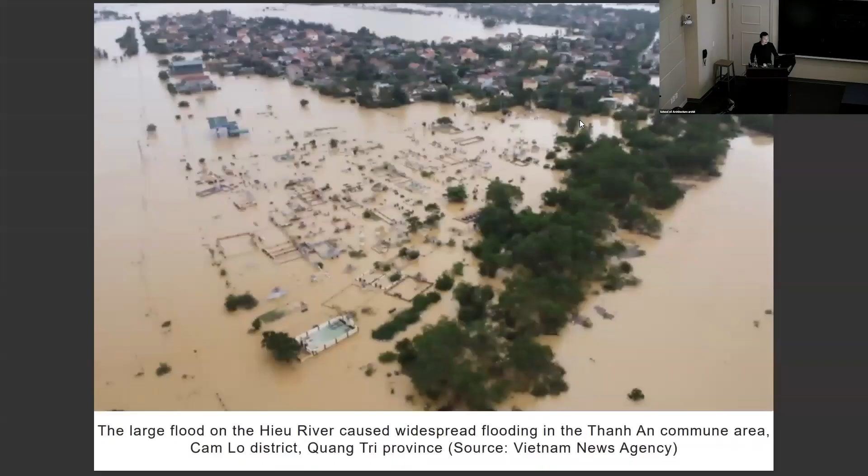First of all, we are dealing with climate change right now, with the flood, flood again, and the flood in Vietnam a few years ago, and the wildfire, and this in the US in 2023. Let me explain the air quality in Vietnam and in the USA. The East Coast is almost green, but there the color is about red, or even worse than red.

And then here is Ho Chi Minh and Hanoi.

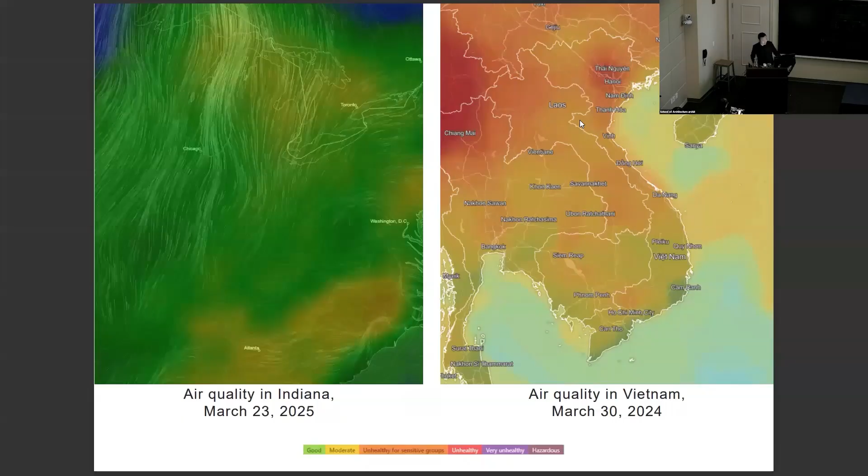In March 30, 2024, it became a very unhealthy situation in Hanoi, and one of the reasons is the lack of greenery. In Ho Chi Minh City, it's only 0.7 square meters per person, and in Hanoi only 2 square meters per person. In East Asia, the average is about 6.2 square meters per person.

Because of that situation, here is the real picture of Ho Chi Minh City with extreme lack of greenery, causing many problems like pollution, traffic jam, and climate change, especially in Vietnam. So what we would like to do is change this current situation to be more green for the city.

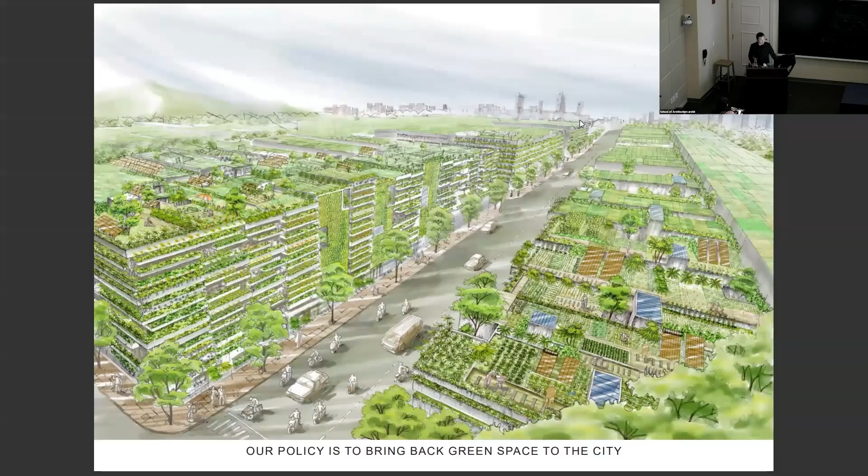For the new master plan, since Vietnam has a lot of rain and sunlight, we propose agriculture on the rooftop and facade to increase the green area for the city. We can also store water on the rooftop, otherwise if everything is concrete, it's easy to get flooded.

Let me explain one by one. For example, here is a really typical type of house in a dense city like Ho Chi Minh City, which is just 4 meters wide and about 20 meters deep.

The environmental strategy is we cover the house all around with greenery, which can stop very strong sunlight and a little bit of polluted air, while sunlight can still go through the house.

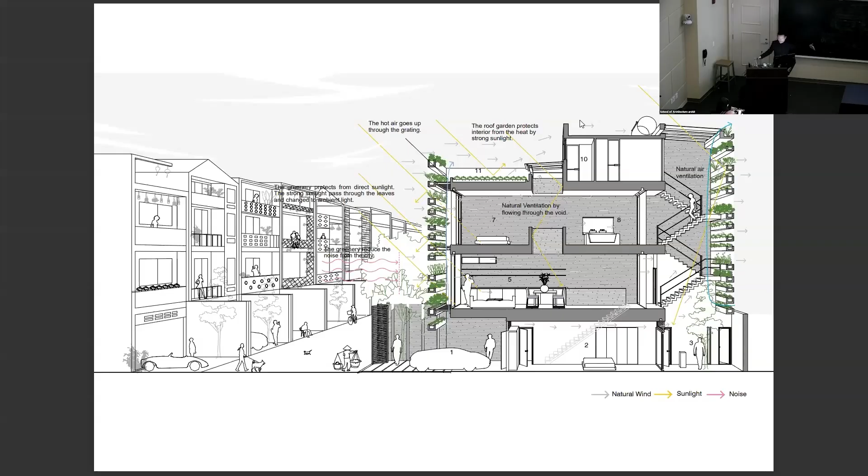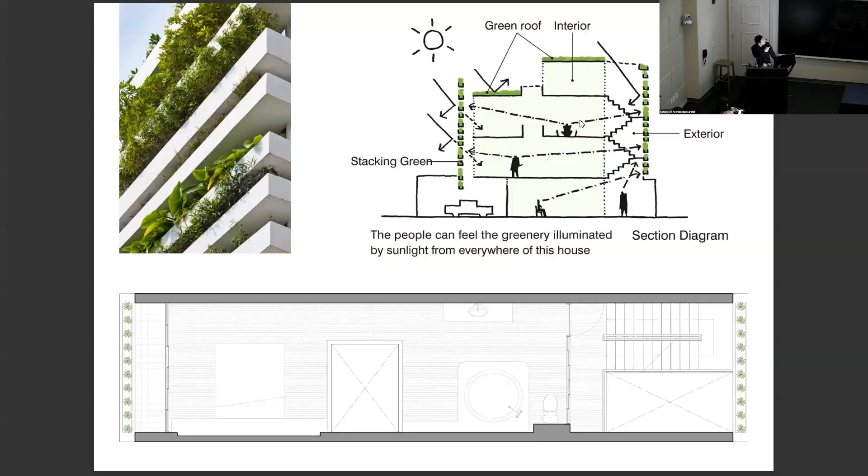This is really small, only 4 meters wide and 20 meters deep. The staircase also functions like a small garden in the backyard, and we still have ventilation with vertical air flow going up. In the plan, you can see the bed is almost as big as this already, showing the scale of the building.

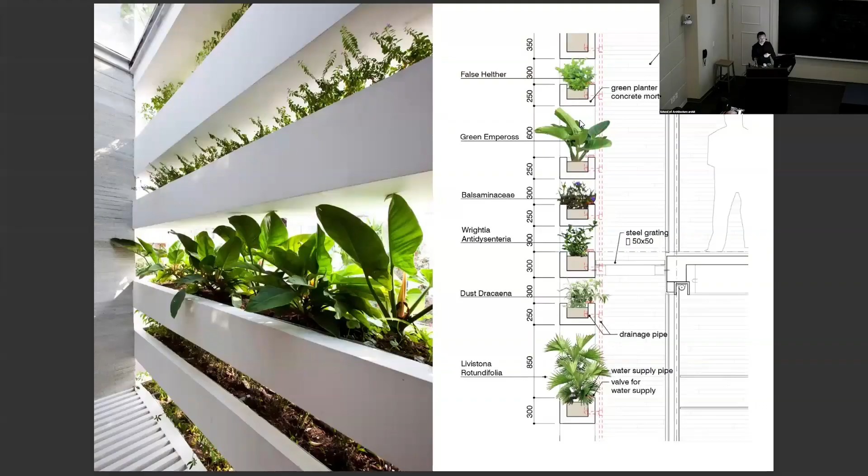For tropical climates, here is the whole weather consideration - instead of regular glass, it should be green and glass. It's better for ventilation and also for the really super hot summer.

You can see the plan here. It's quite small for the house, but it has one bedroom, garage, living, dining, and one more bedroom plus another bedroom on the rooftop. So three bedrooms within a really small house - this is a really typical house in Vietnam.

Here is the living room, dining room, and bedroom. It looks big, but in fact there's just 1.4 meters left from here, and the bed is like this. And the bathroom.

For another project, we are trying to make each project become like a small park for the city. Here is the kindergarten for the Taiwanese shoe factory, where about 23,000 workers work, and their children go to study here.

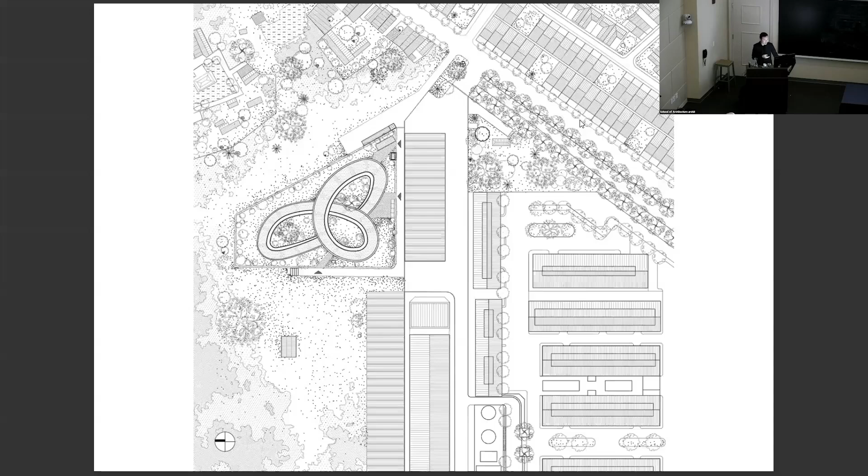We proposed this with 3 courtyards, and the courtyards continue up to the rooftop almost unlimited, extending the garden as playground space for the children. The factory is here, and with the 3 courtyards connecting together, we maximize the playground for children from the ground to the rooftop and back again.

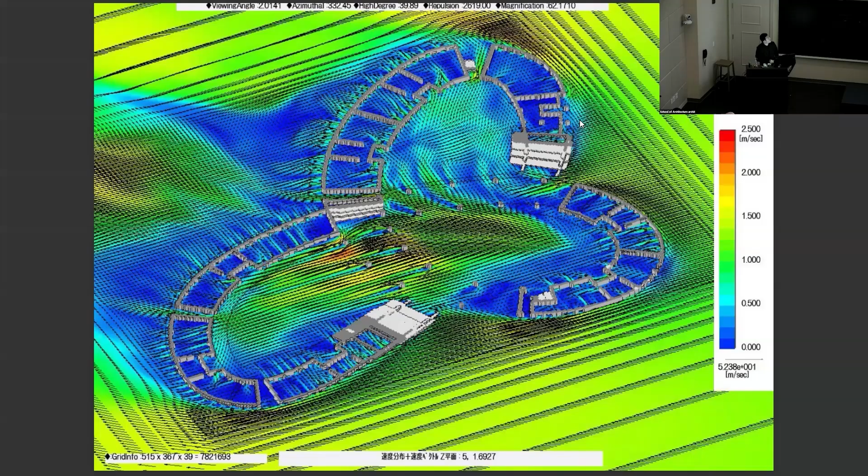Because we don't have budget for air conditioning, we need to calculate the wind carefully to make sure that everywhere within the building, in every classroom, we have wind passing through, with a green rooftop farm on top.

For the school, the children can enjoy growing vegetables, and we chose a type of vegetable for them to have a little bit of an interesting landscape.

Because their parents are farmers, they know how to grow the vegetables very well, and the children can enjoy that process together.

You can see here the courtyards connecting together, and it grows up to the roof.

Another building here is the House for Trees. I designed it for a depressed client - he was my friend, and he had a problem with mental health. So we designed the house.

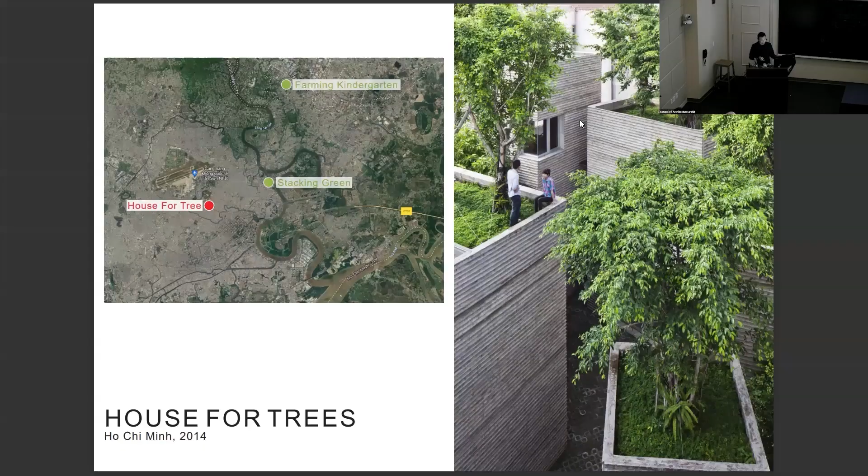It looked like a park because it's in the middle of a concrete jungle with steel roofs, so we thought we should add a lot of greenery to the building itself, because he tends to stay in his room rather than going out. This house is really difficult to stay in because even if he wants to go to the toilet, he needs to go out of his room.

The building makes him go out, even when he goes to the dining room for lunch or breakfast he needs to leave his room. So it makes him go out many times for the restroom, for a shower, for food. Gradually his symptoms became okay, and then he started to complain, 'Hey, there are too many birds coming to my home to sing every day, because the surrounding area doesn't have many trees, so they come here to play with him.'

The concept is really simple. It's just three pots, three boxes with concrete formwork, bamboo formwork concrete. It looks like a solid box from outside, but in reality it's open to the courtyards inside, very open. Intentionally from outside it looks like a closed tree box, but it opens very well to the courtyards.

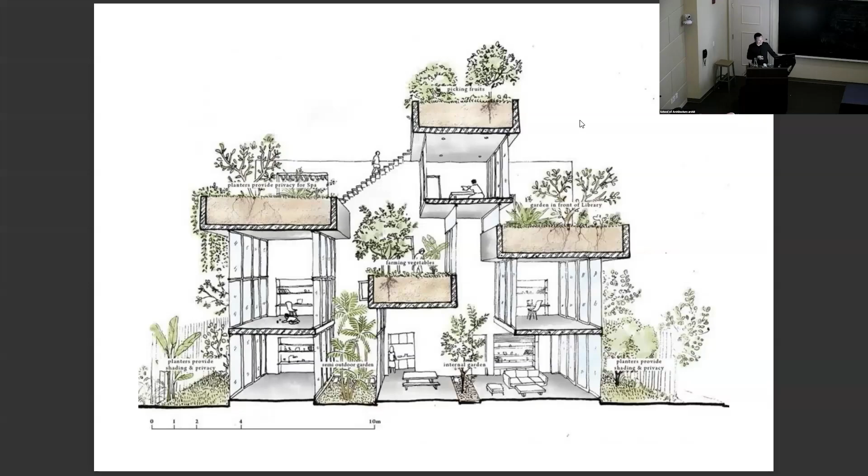Of course it's easier to live in than the previous house. You can see here, from this point you can see many levels of the house and see through the space.

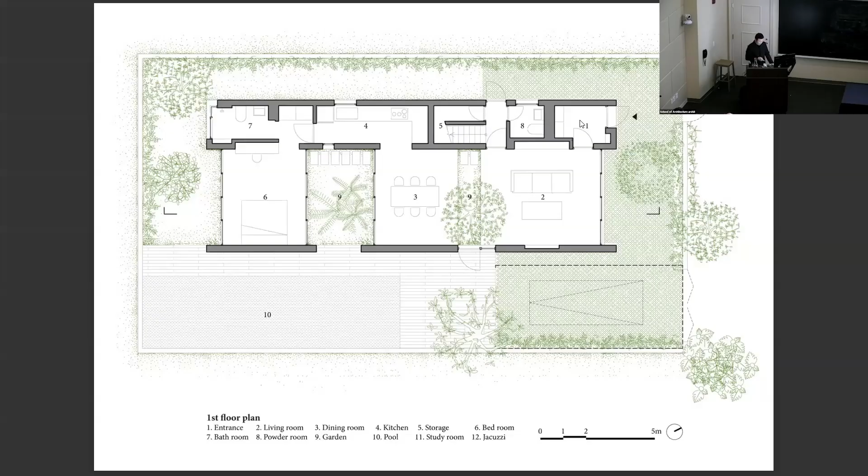That's why the son was able to quit gaming, started to learn well, and finally entered Sydney University for computer science. Somehow architecture can change the lifestyle of the client very well. You can see here many layouts, many steps of the garden.

Another example is in the middle of the concrete jungle of Da Nang, because of the development you can see the concrete all around. We thought we'd make a little bit of a difference by keeping it really simple, but on a very small site, about 7,000 square feet of land, we built 153 hotel rooms. So it's quite a lot.

For the facade and the entrance, we still combined the concrete, bamboo concrete formwork, and timber and bamboo for the interior space. It still feels local, but in reality it's a really big building with a lot of area inside. It's a bit of a pity that we don't have space for a void for the check-in area or restaurant, but you can see between the concrete hues it appears really nice.

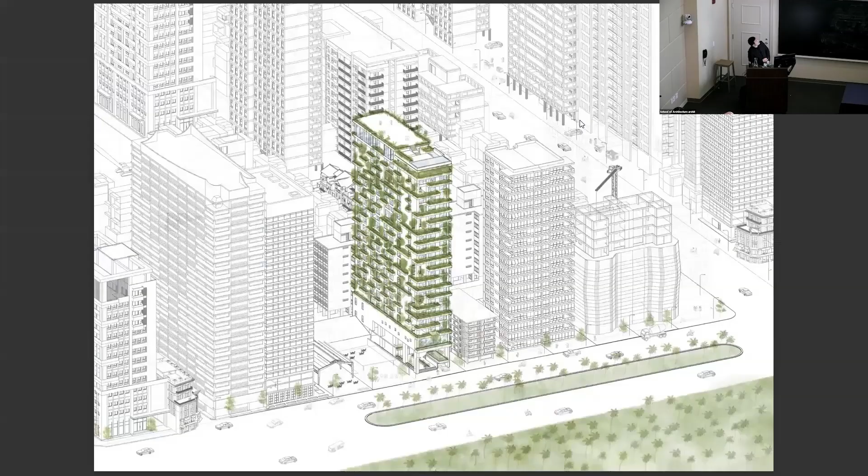Another house is easier to explain. It connects to the park here, so we wanted to introduce the park going through the house this way, and we have a huge void in the middle where you can see the park go through the house. From here you can imagine the weather in Vietnam, which has a lot of rain and sunlight for free.

There's a rooftop garden connecting to the park. You go in, go up, and you're living in the park. As I've mentioned and will say again, each of our projects is like a small pocket park for the city, so as we add more and more projects, the city gradually changes.

Luckily, a lot of Vietnamese architects also like this way of integrating greenery into buildings, and together we are changing the city. We don't have space to plant trees outside, but we use our buildings as devices to change the city landscape. This next house is even narrower, less than 4 meters wide, from here to there.

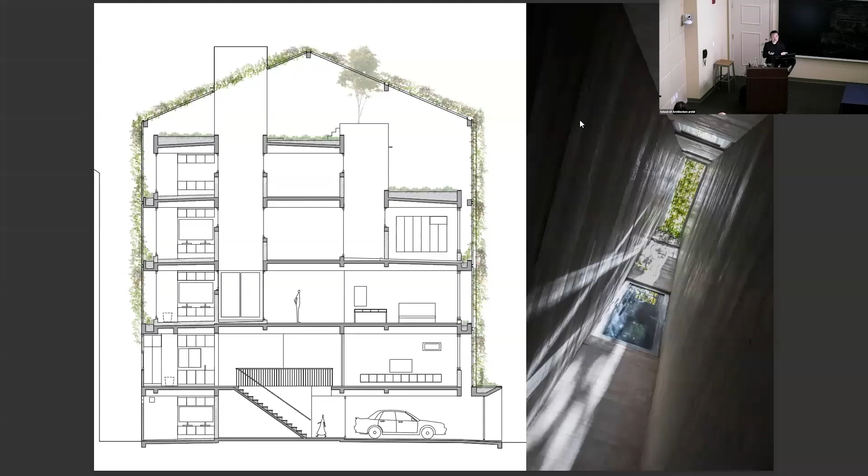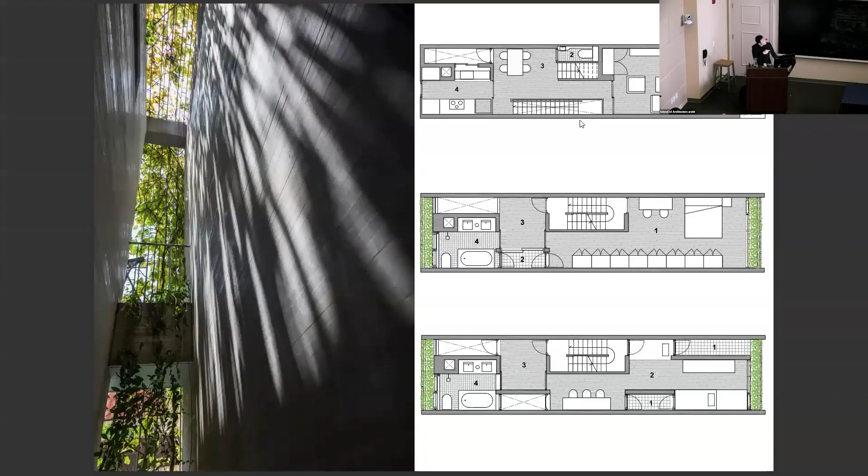Between those courtyards within a really tiny, very small house, we cover it with greenery like this. The courtyards in the middle are here, and this is the facade for the house. You see the scale of the staircase here, almost more than half of the house, which shows you how narrow it is. But we still have a good, five-star standard bathroom.

One floor connects together, with greenery covering around, and small courtyards for the air to move around the house. There's the bathroom, the bedroom, the courtyards, and the rooftop.

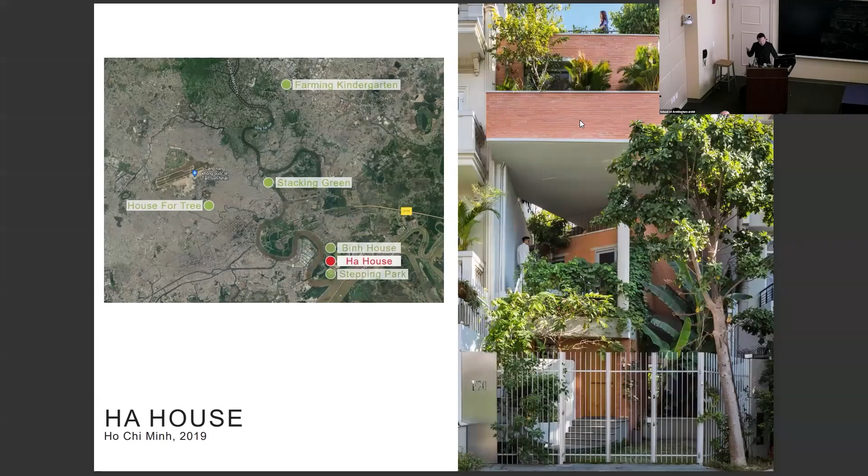And we did that, and during COVID, people in Vietnam, same as China, were locked in their homes. You couldn't go out for any reason for a long time. Then people started to appreciate the space, the garden, much more. After COVID, and during COVID, suddenly the work in my company grew a lot because they felt, oh, it's nice to have that.

This client's is the first house, the narrow house, from when I came back from Japan. I started with my own projects. I didn't have work, so I started by buying 7,000 pieces of bamboo for 7,000 US dollars to build the wind and water cafe. It became well known, but people still kept saying Nghia can only do bamboo, so I started doing the first house for free for my friend.

Now she keeps asking me to do many houses for her—this is the second one, and now we're doing the third, even a fourth, because she said, I like your design very much, you changed my life through architecture. So she enjoys buying the land and asking me to build the house, then she sells it or keeps it, and asks me to do the next one.

This one is the second house. He has a boy, and it's really narrow too—only 7 meters by 20 meters, about 140 square meters, or 1,400 square feet of land. But we still created a stepping garden moving around the house, with the box itself moving and turning.

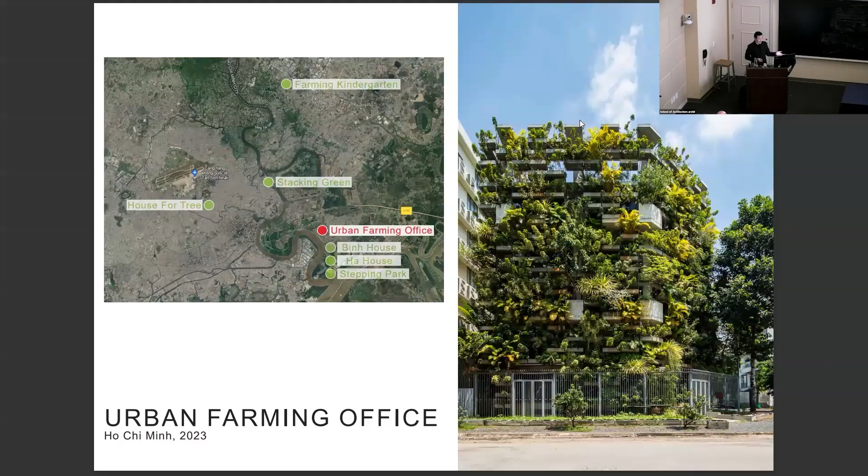That's why it turns, and we still have a swimming pool on the ground floor, with the garden wrapping around. The space inside introduces sunlight and views to the garden—from the master bedroom you can see the garden over there, and the study space. This is my own office in Ho Chi Minh City.

As I mentioned, during COVID people appreciated our architecture more, and we did a lot of work during that period. This building is a very low-cost one, because as an architect we do very simple things for ourselves, but the space—

Here it worked quite well during COVID because we just open the window, don't even use the air conditioner—the ventilation, air goes in, air goes up, and we can stay here and plant vegetables around. We enjoyed the COVID period inside this building because, as I mentioned, we had strict quarantine in Vietnam—you couldn't go out of your building.

The system is quite simple—it's a concrete slab, and we hang the whole tree system outside. This guy becomes the hanging pot holder, but it has a super big beam, and we hang all that stuff to it, and in the same way we hang the pots up top. I think I should go back outside so you can see it clearly.

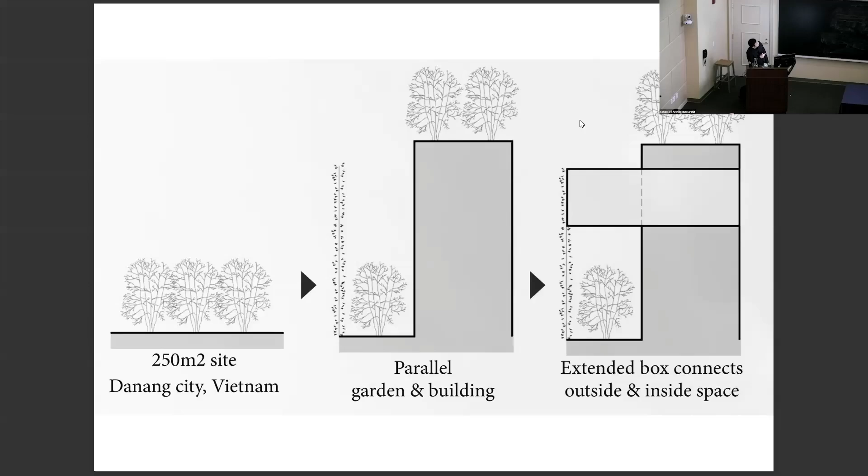So another project, we also think about the building. The house is separated and we make a green facade, and we build a really big pot on top to plant a tree on top.

So the section is like this and it connects together vertically and outside, and the living room can connect, and we still can put the pond and the fish pond here, and we pump up water to the rooftop, and we collect the water from there for the fish — it's kind of an ecological system.

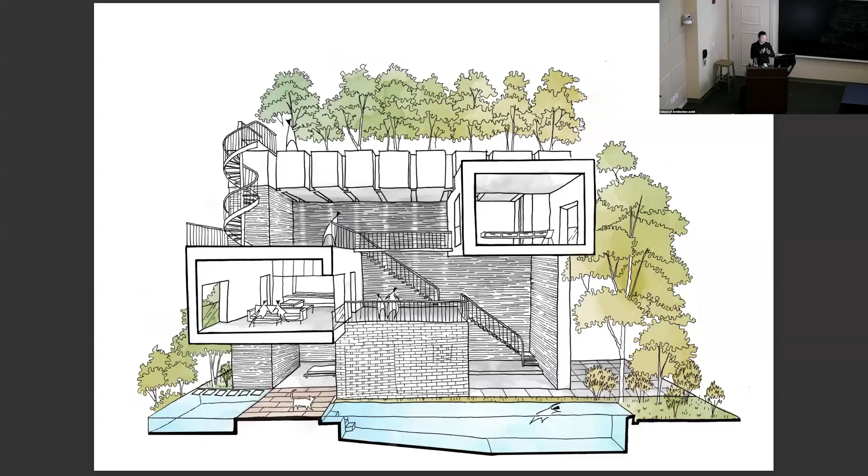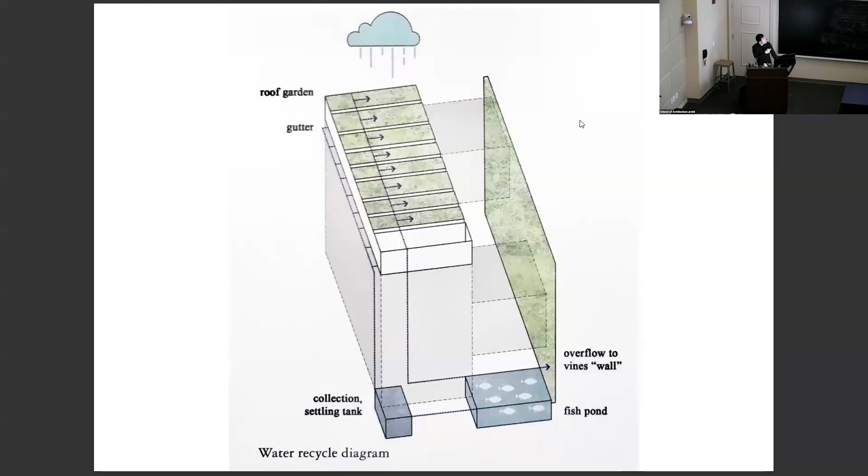And here you can see the way we do it is the green facade, the green rooftop, like this. And we still can have the pool here on the ground floor.

And the connection between the ground floor, first floor, second floor, and from inside to outside. So it works quite well with the weather in central Vietnam and the sunlight.

Of course, not every time in the day — it's just a very short time at noon when the light can go through, and at other moments the light is really soft because of the leaf and the deep pot like this, and the master bedroom.

And gradually we change every project to become a green space for the city. This is outside Hanoi, so we still have some green space around, but we plan the whole thing with really dense greenery.

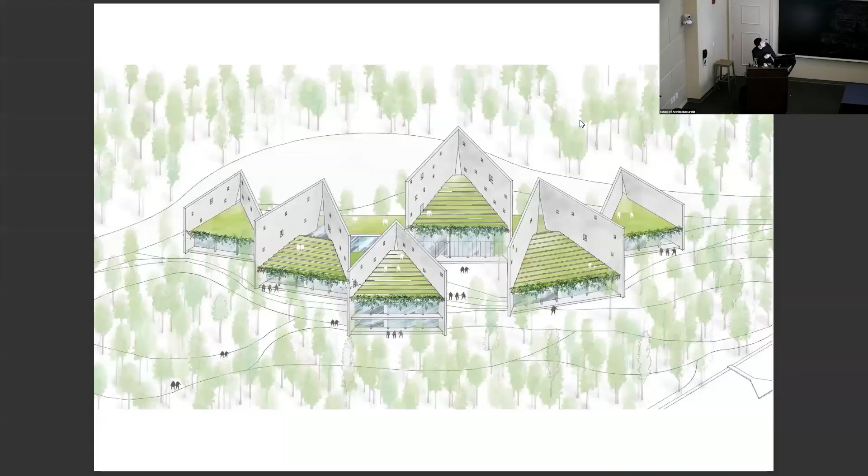For this one is office. Then they can enjoy the courtyards at the ground floor and at the rooftop, and the space inside with the courtyards around.

And this is the Academy Center. The concept is we put the boxes in the middle of the greenery, and we connect them together by a concrete slab. And we build a pond in the middle of the space to make the climate there for the heat.

In Vietnam, in the summer, it goes over 100 Fahrenheit, right? It's about, yeah, sometimes it's 110, and it stays that way for many months. So that's why we designed this to reduce the energy consumption for air conditioning.

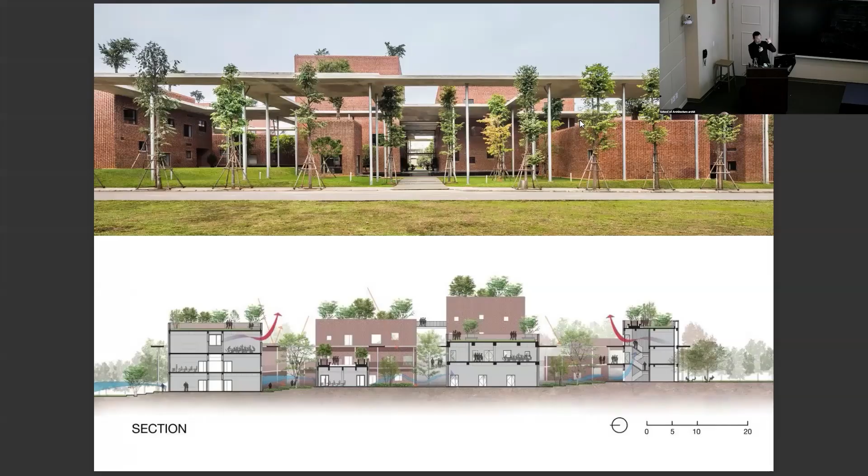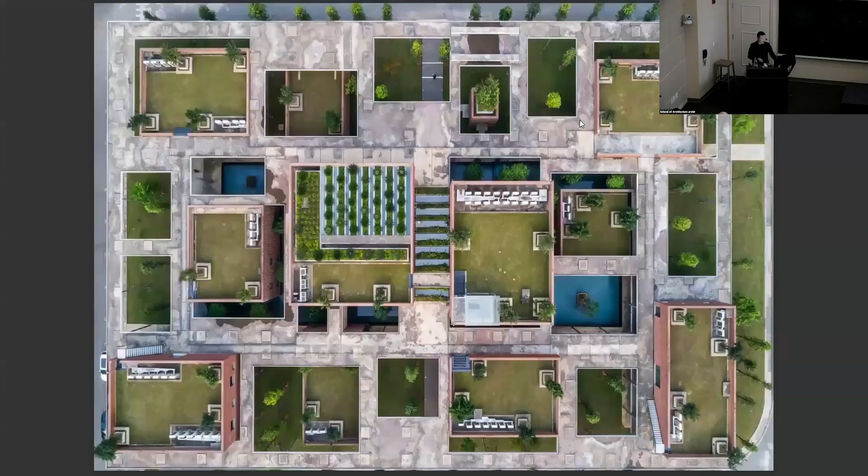And we also make the wall itself have its own shadow from the brick. You see here, they have their own shadow, and the pond in the middle and the tree make shadow too. That's why we can save a lot of energy for the air conditioner.

And manpower in Vietnam is still reasonable cost, so that's why they can realize a really difficult brick construction.

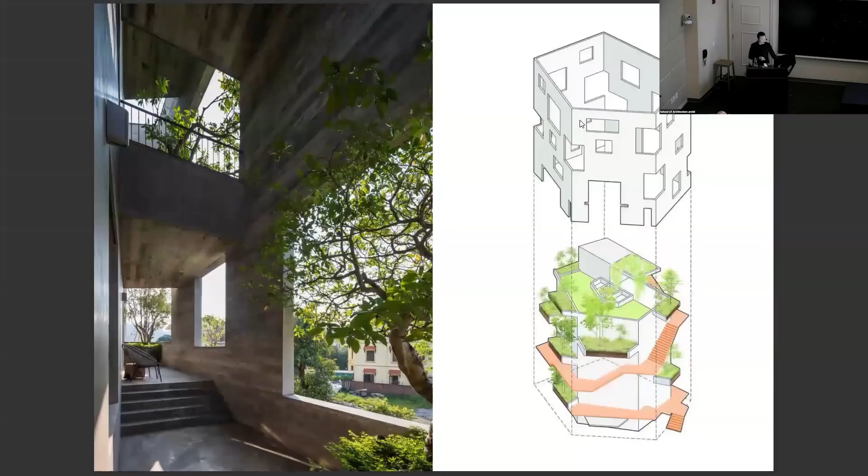And another house — again, I repeat, each house is like a small green space for the city. If we add more like that, gradually it changes. And the system here is the green space going around, with the concrete facade around, and the tree in the middle, and the space inside works quite well during the summer too.

You can see it from outside — we can see a lot of big trees through the window. And the inside space still sometimes has enough sunlight, but it's still soft enough to enjoy.

And the bedroom, with the space in between inside and outside.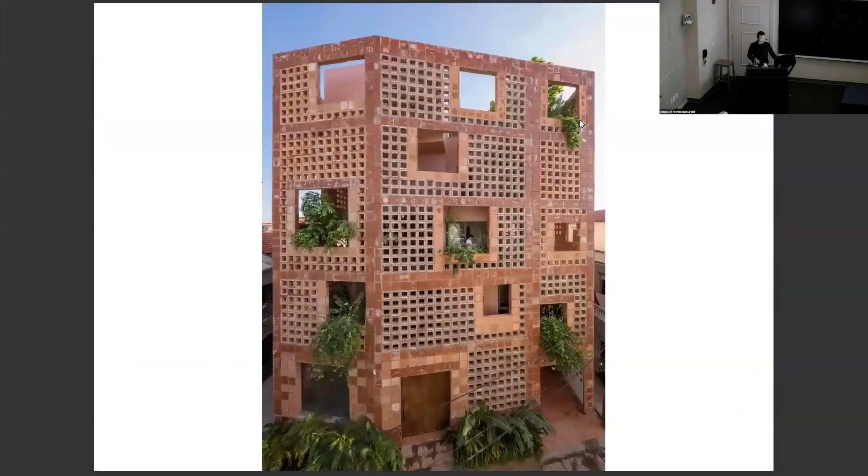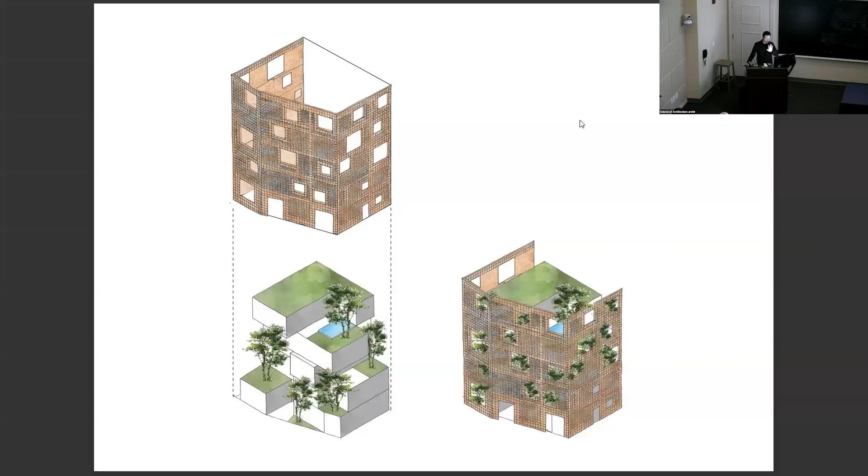And another house in northern Vietnam, Hanoi, is the pottery village, so it's really polluted air around. And then we do the same, and we cover it, since the landscape around is not really nice. So that's why I cover it all by this and filter the view from inside, with the tree in the middle.

And from inside, we can't see the ugly surroundings clearly, just see the space in the middle of inside and outside, like this way.

And another one is in Myanmar. This is a meditation hall, and this work is based on donation. There is a steel factory that donates the steel, so we offer our design for free and construction management for free.

Because the situation in Myanmar right now is that electricity sometimes stops, we design a building like big trees with a big roof going off, and we put it there.

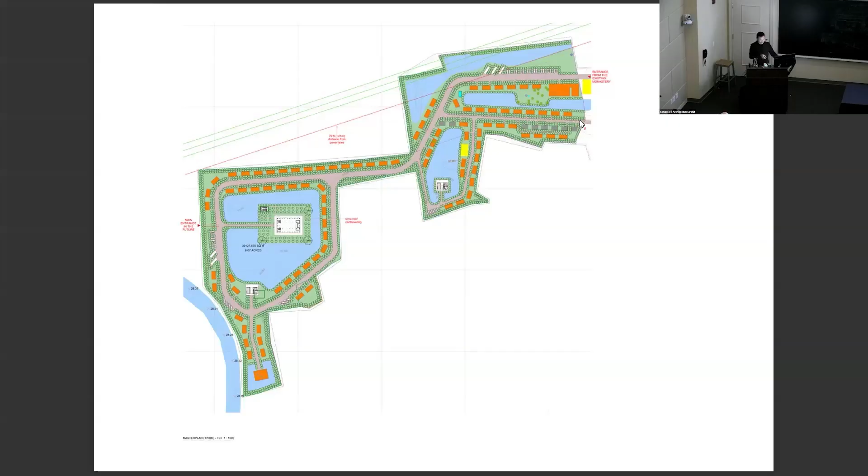So I use the soil around to make the lake and put it for the building. We plant the trees surrounding the meditation hall, and we put it here, tree and water, and the building itself looks like a tree shape.

We have two layers of the roof here, so the hot air goes up, and one more layer for the bamboo roof is here. Of course here is freely open space to the outside, and water goes beyond the tree, the water space. That's why they can still use it during the hot summer, and yangon they don't have winter. The rain there is really big and a lot, so we make a big eave for the roof.

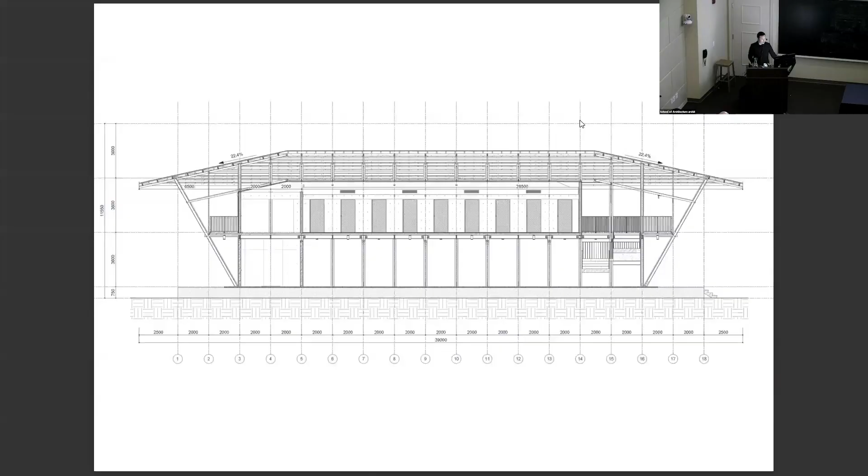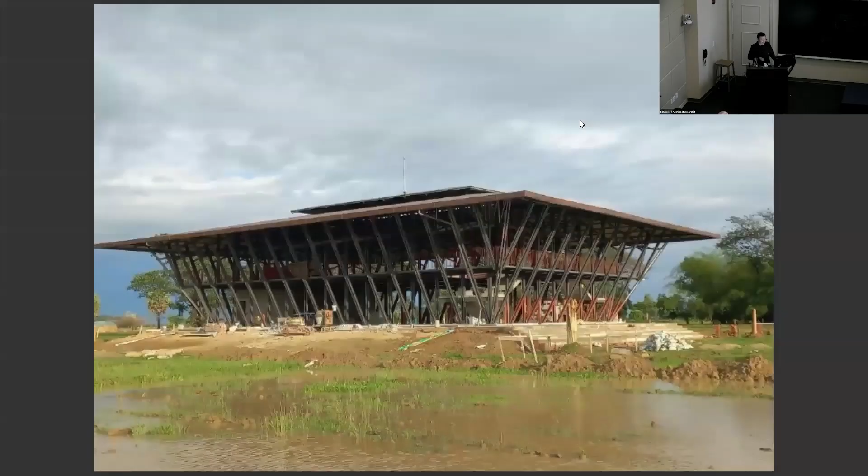They offer the steel. It's really simple structure, but I think it will work very well with the weather there. Gradually, we have 2 layers of the roof, the hot air goes out, and one more layer for the bamboo roof under that.

When we design it, we prepare the system for the steel structure for the solar panel on the rooftop, so later on, if they offer little by little, we can add it. This is not finished yet, the second roof which is the bamboo roof, not finished yet. If it's finished, it looks like this.

And why the view here? Because during meditation, we tend to close our eyes, so the window is really low, for ventilation, basically not for the view. But the ground floor is open completely to the outside.

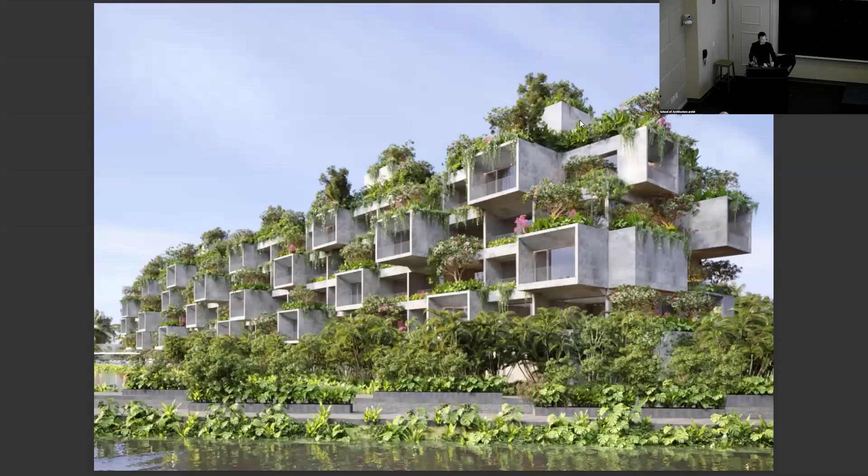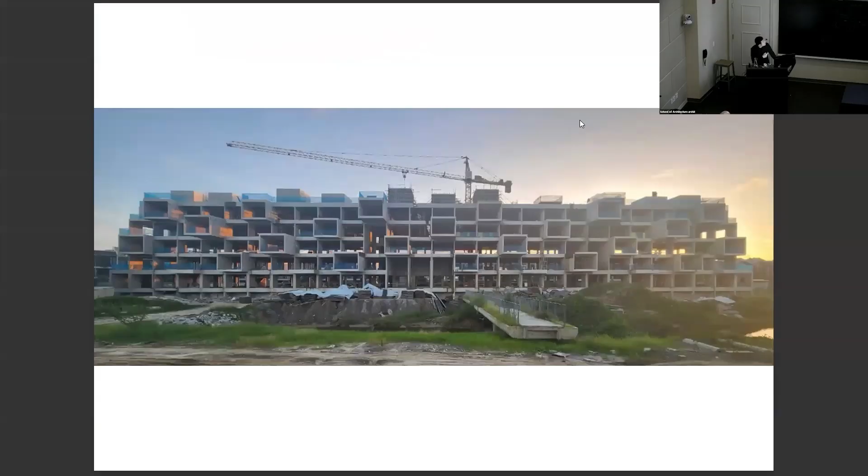And another hotel in the middle of Vietnam. We did the whole master plan, and the client was successful with the real estate business, so he agreed to spend a bit more money for the hotel. We start to build this already, but we make shadow by the box because here it is crazy hot, more than 100 Fahrenheit during the long summer with no winter. We make the shadow with the tree, and now it's almost going to be done. They are doing interior right now.

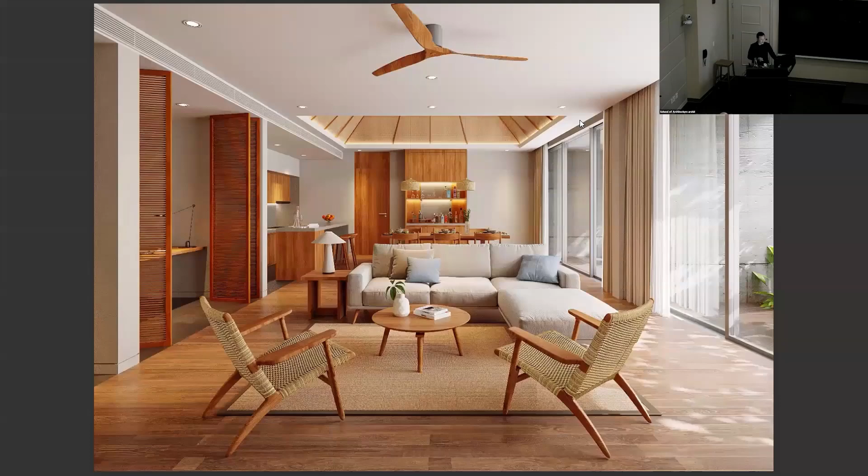Here is the reception, the reception, the VIP room, and the reception that now is going to be finished.

And another house. So as much as we do, we think much about the way we save energy and how we can deal with climate change, which will be the biggest issue for us right now, because climate change influences every country, even in Vietnam, especially nowadays, around the world with wildfires, with storms. A huge storm attacked Florida last year, or in Vietnam the same, this huge storm comes every year.

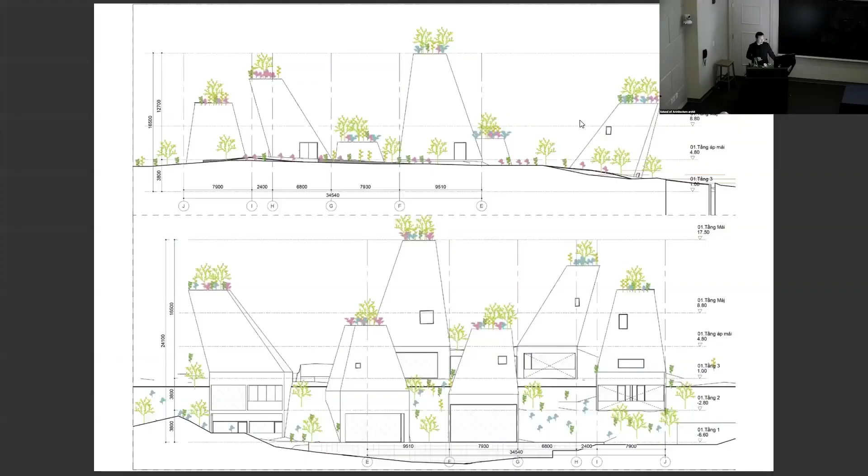So we designed this house like a tower of wind to go through the house, with the greenery and the section here, the living room, dining room, and this bedroom is crazy tall, about 9 meters, even taller than this.

But the client said they like it. I said no, we need to do it lower. But the client said no, we need this, if I can't sleep I would sleep in the next room. So we kept it like this.

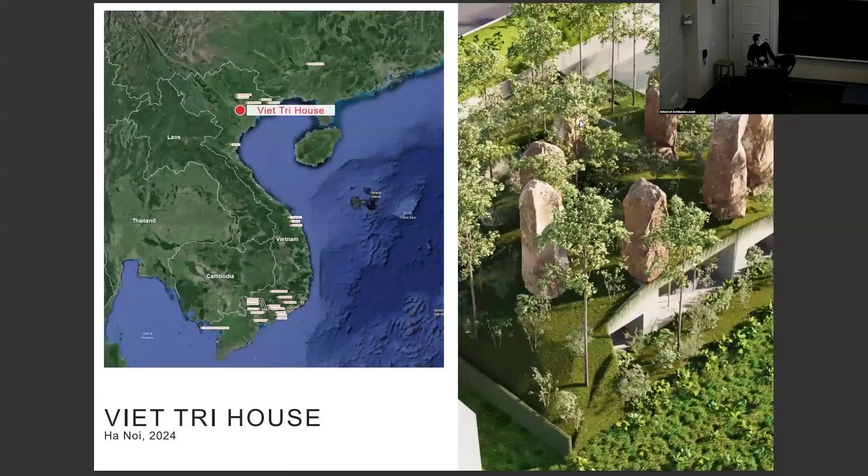So the meditation space, the library, and another house, the client said they want to have the house, but not the house.

So we think this is a good chance, because I've been thinking about this for a long time - the house with the wind tower. Can I skip to the plan a little bit?

For example, the wind tower goes down here, and behind that we have the courtyards. These courtyards create the minus pressure, and from the stone tower, the wind goes through. You know what I mean?

The wind is really easy - we just make a different pressure for the air. For example, you have a dam, right? If the water means high pressure and low pressure without water, and if you make any shape of leaking, the water can go through if they have different pressure, and of course this shape doesn't go higher than the water.

That's it. And the air is easier, so the wind from the river comes in and we catch it and let it go down to the courtyards, and then the house looks like a stone park. And of course we can do vegetable rooftop agriculture, with every function underneath that.

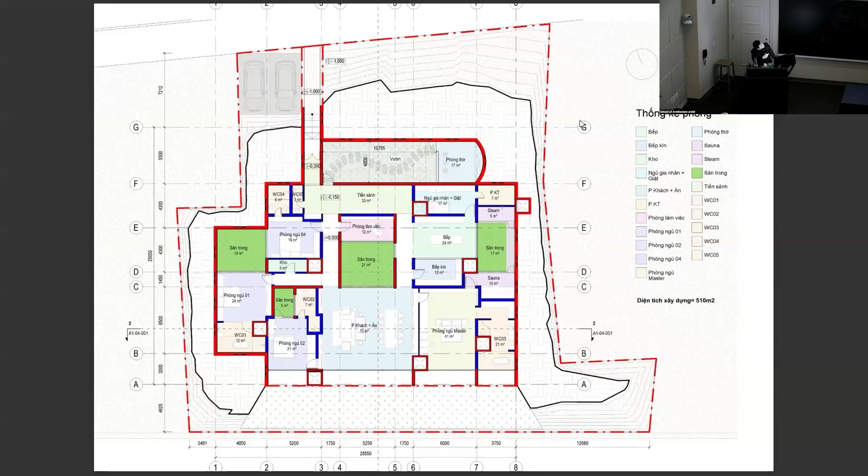But from above we just see a few stones, and he's a mechanical engineer - he said making this stone like this for the wind tower is not difficult for him. He can do that.

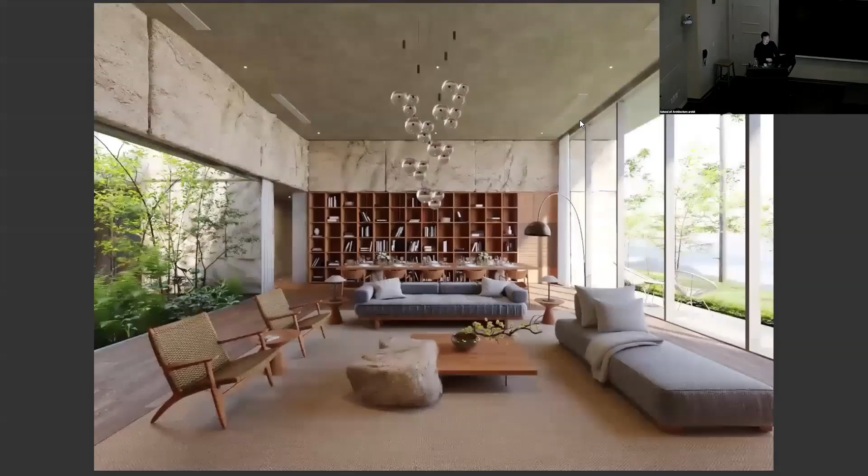We catch the wind from the top, and we can even do a little bit of water here, which cools it, and then the air can go through. And of course we can control the air easier because the wind tower goes down here.

Can you see the louver here? The wind tower goes down here, goes this way.

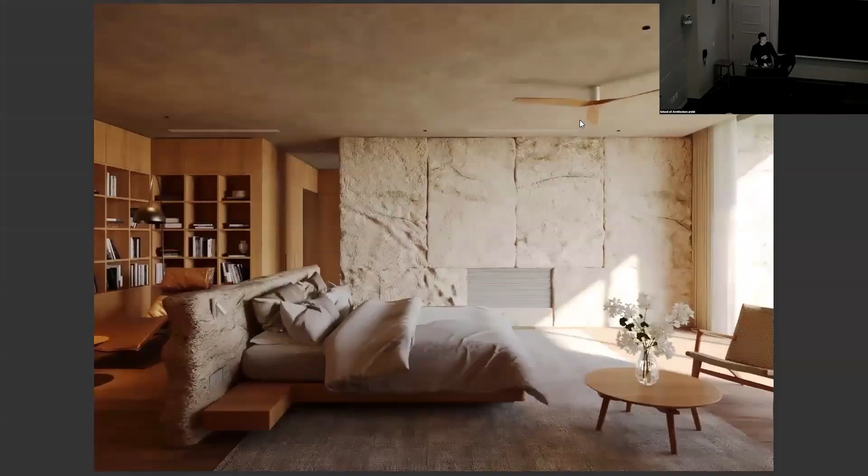He made all the furniture and interiors with a super strong stone image, and here is the meditation space in front, and the bathroom.

I think the last concrete project is one we recently designed - a waste to energy plant, which is now going into construction. It should start construction soon, within a few days.

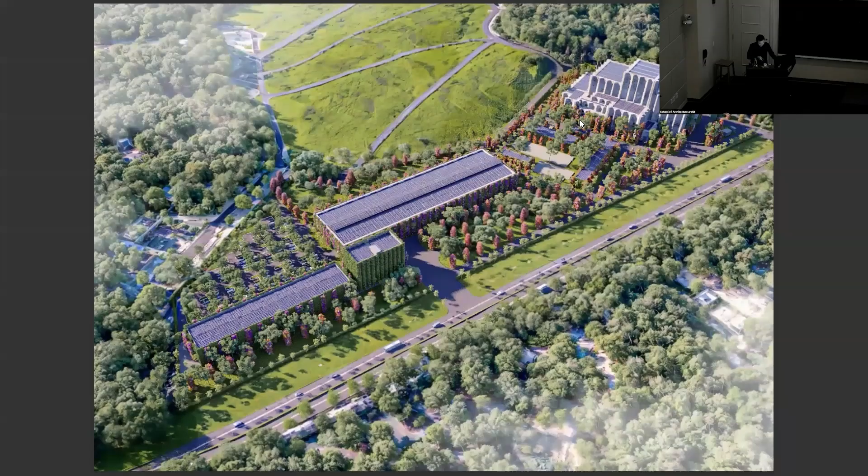It's really polluted. But the client is a concrete company, so we took advantage of their ability to manufacture all the concrete at the factory. It looked really difficult, but in reality they put it together part by part, piece by piece, easily.

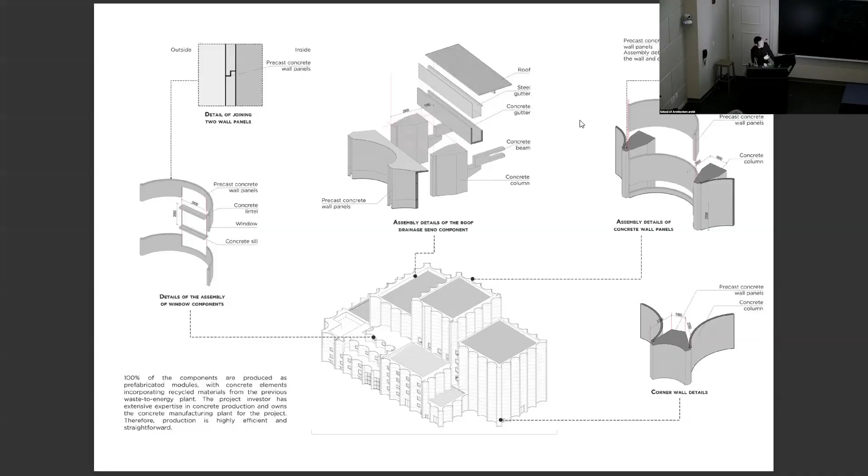They use that for concrete, and then build next to it and put it together. It's very fast and easy - it looks difficult, but in reality it's easy to make.

Also the bougainvillea and flowers are quite easy for them to do, because now it's about 20 meters, but I divide it into many floors, and we plan the layout - layout 2, 3, 4 - and then gradually the one on the ground floor will grow up and cover all of it. We manufactured that system too, to bolt it together and make the building work.

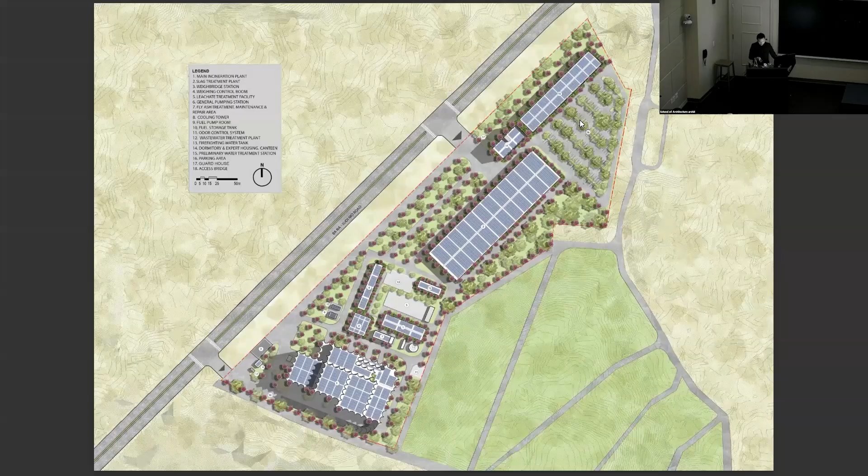For the factory nearby, they use the concrete waste to make concrete, and at the factory we did the same with the green facade, to turn it into a real park for visitors to come and see how we changed a really polluted area into a flower park, with diversity of greenery.

The concrete factory is nearby, and we did all the roof with solar panels, because as I mentioned, there's a lot of sunlight here, and because of the sunlight it fits very well with bougainvillea.

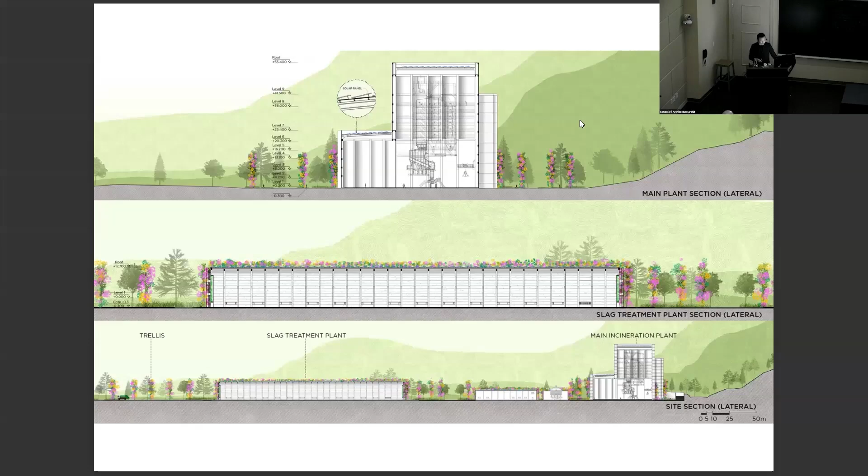We designed the roof to let heat go out, and finally we have this design for the factory, which is covered to reduce energy consumption.

You can see the flower tower - of course we had to open it in the middle for people to climb up, but the one big part, each layout, will fill the greenery fast within a few months, and later on the biggest one underneath will grow up to cover it, so we don't need to maintain it anymore later.

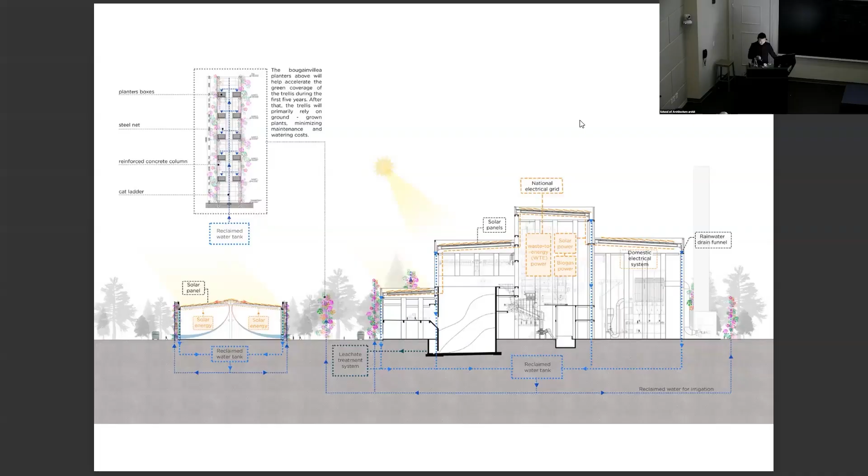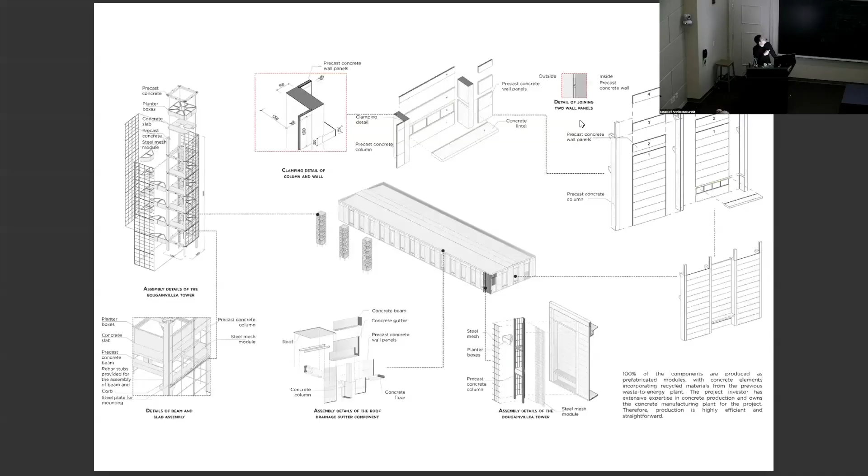You see here the detail of the facade and the column, each column for the factory, and it turned into this. And finally, your topic is about bamboo, right?

We treat bamboo: we ban it first, then we soak it into water, and we smoke it - the natural way to treat the bamboo.

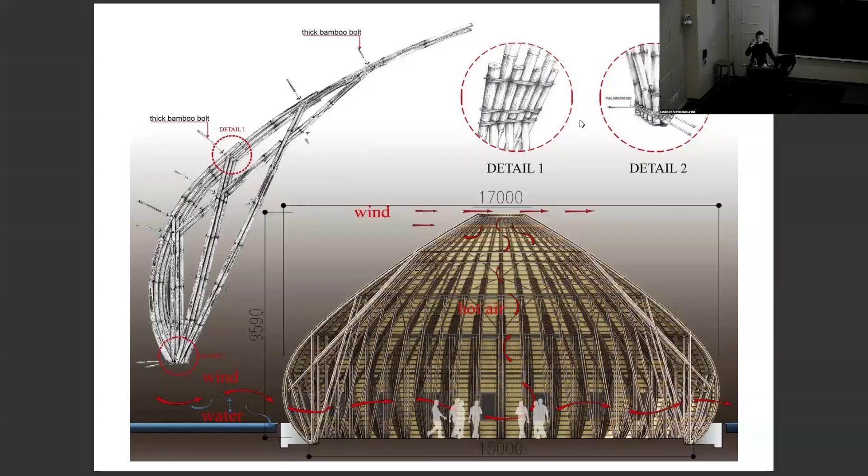The almost first one I did when I came back from Japan is this one. I built my own and stayed with the worker - it took me about 1 week to redo and redo this one. But from the next day it was easy. They copied it.

Every day with 2 or 3 pieces, and within a few weeks we have the dome already. I put the dome in the middle of the lake, so it cools very well during the summer, with the thatch roof and the space inside.

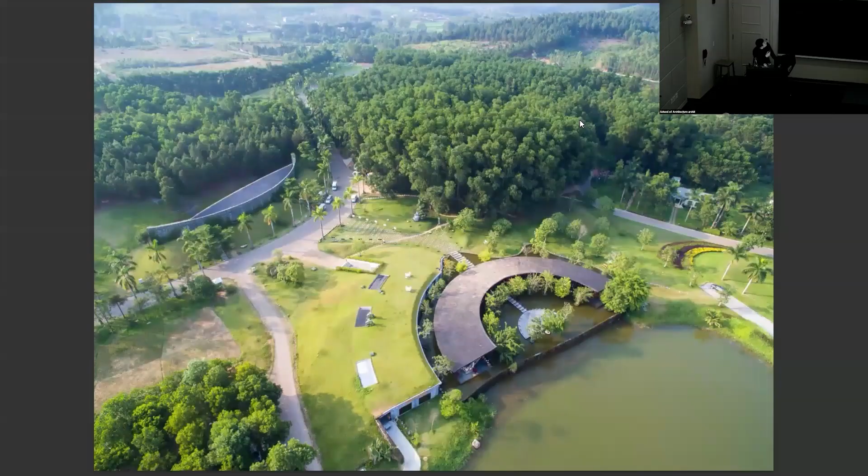I use the rest of the pieces of bamboo to make the furniture, the light, everything, because at that moment the worker, the manpower, is not expensive in Vietnam. So for the next one, we build two of this.

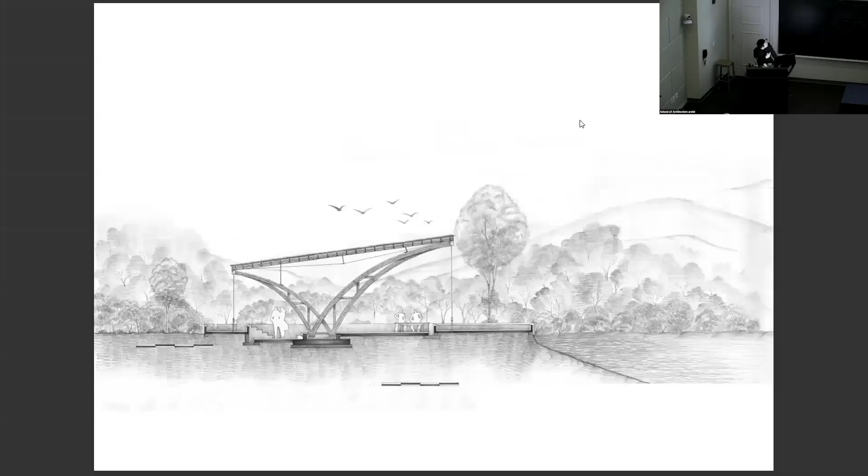Next, I studied engineering in Japan, so I wanted to challenge the bamboo structure to cantilever 12 meters, like a cantilever here, then it opens up to the surrounding. From here to here is 12 meters, and of course we need the tension here and the tension here - it bends here, and we put the tension here to hold it up. Not enough, so we still have some small support here, and it worked well with the humidity.

Someone asked me about the bamboo - you can see here we protect the bamboo carefully from the rain, even the top of this one. Bamboo hates water. If you put bamboo outside, very fast, within 1 to 3 years - people from Asia will know that with high humidity and rain, the bamboo will damage.

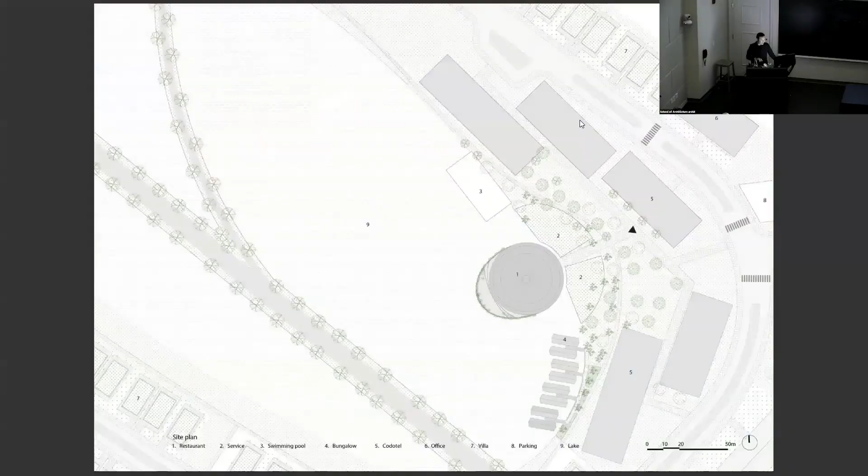And here, look - this one is about 36 meters. It's huge, the area is more than 10,000 square feet for the dome. It's a pure bamboo structure.

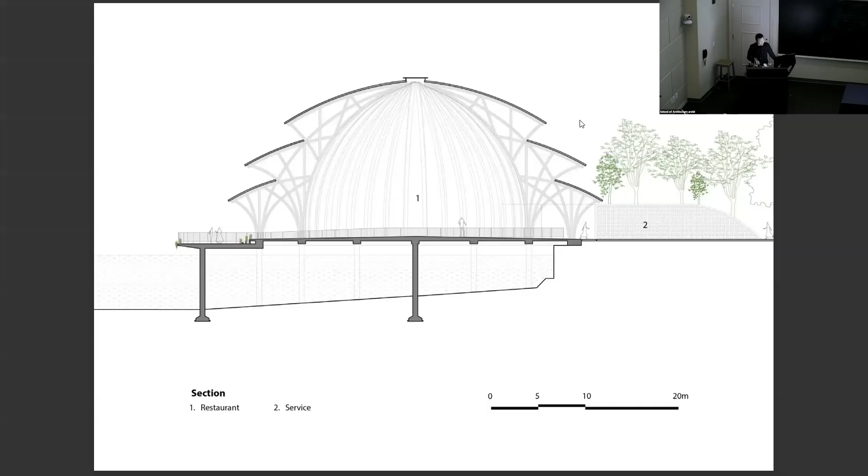It looks familiar, right? Because you see - we design the one unit and we copy it. But here it's not a decoration, it's a brace between the units together.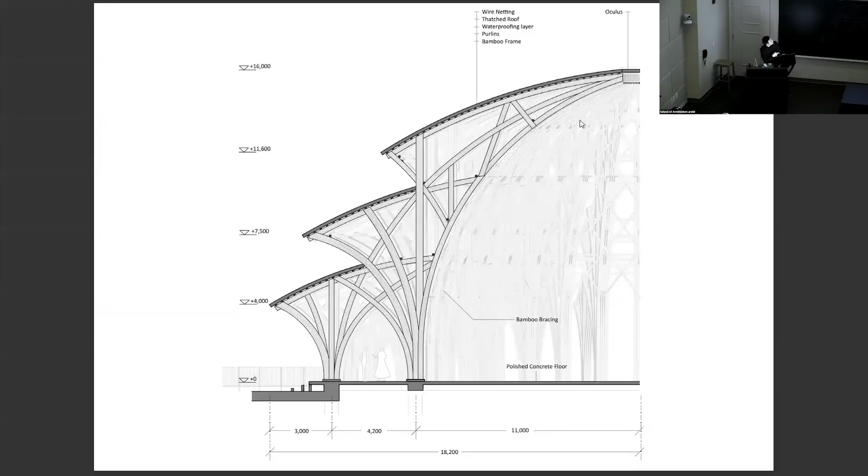We also have many braces outside to make it solid to deal with storms. The open space between inside and outside has a buffer zone, and one unit is like this one, with the space in the middle - inside and outside - and we put it on a leg, so the ventilation is quite well.

Another project is in southern Vietnam. The structure system here has 2 domes inside, and the grid system is outside that, which is really difficult in terms of the detail, because of the curve system - the straight one, the grid system outside.

There are many braces, you can see. I put it between the grid system, and also slowly - it's hard to have the arch, the curve, the arch come together and the grid come together.

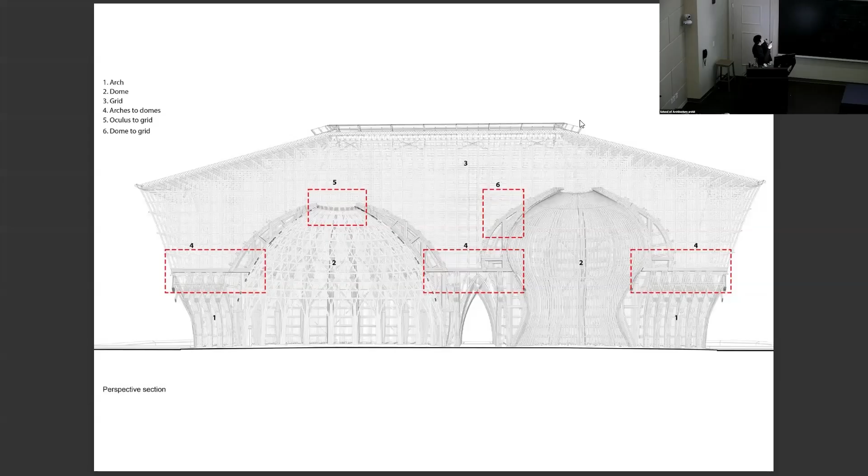This grid, to protect the bamboo, has to be like this - the cantilever, the eave deep enough for protecting the bamboo. You can see here the brace - oh, the brace is clearly seen.

And the cantilever here, we need some brace going up that way. Otherwise it sinks, goes down.

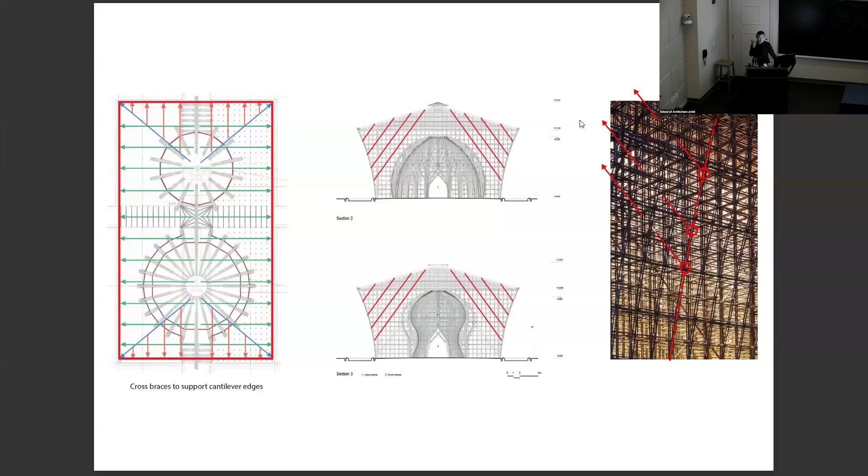You see, we hang it up here, and we hang it this way too. We don't hang it by steel, but by bamboo to hang it up. You can see it, but it's big, so we cannot see it clearly from outside. But in reality, you can see the brace and the hanging member on the structure.

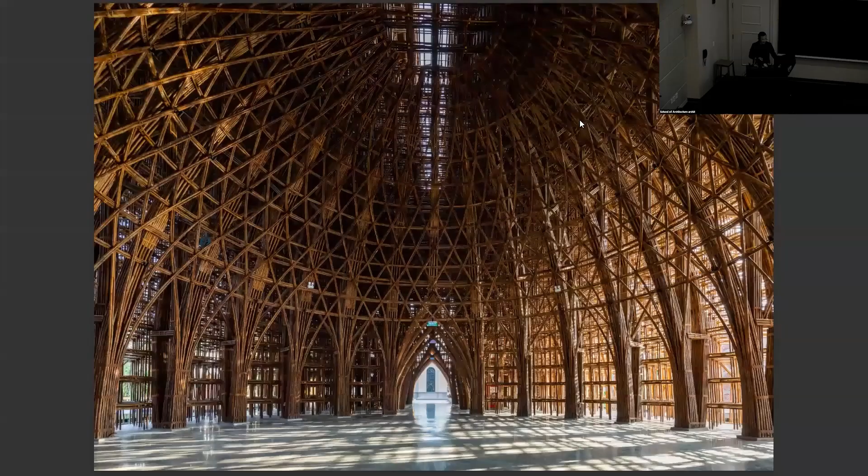The water comes here and we collect it somewhere. When we build it, we use some small steel for framing at the beginning, but at the end it's no longer needed - we keep the steel, some small element there to have the form at the beginning for easier building. That's it. Here you can see clearly the brace and the hanging system, and inside is really soft sunlight and a nice interior space for the welcoming center.

You see the detail when it touches the grid, touches the curve. It doesn't show here, and you see the curve with the arch.

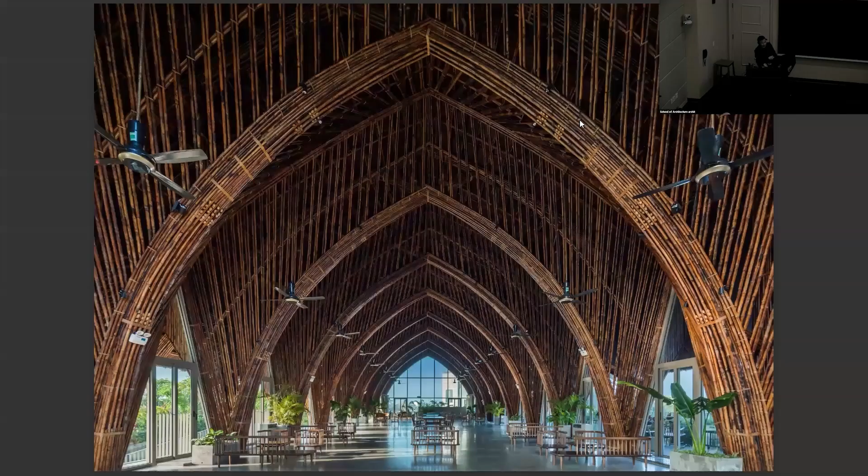So the hotel is under construction, there's something around here. We built this one, did the master plan, and built the bamboo structure here. It looked like a water coconut tree.

2-3 years ago there was a huge historical storm in this area. The client is a structural engineer with a really big company that builds bridges and infrastructure. He said, no way, nature tested us with a huge storm like we hadn't had before. But after the storm I called him and asked what happened to his building. He said nothing, only one problem, the roof got wet, meaning only the outside of the roof got wet. He made a joke about it. But it's quite nice, the unit supports very well.

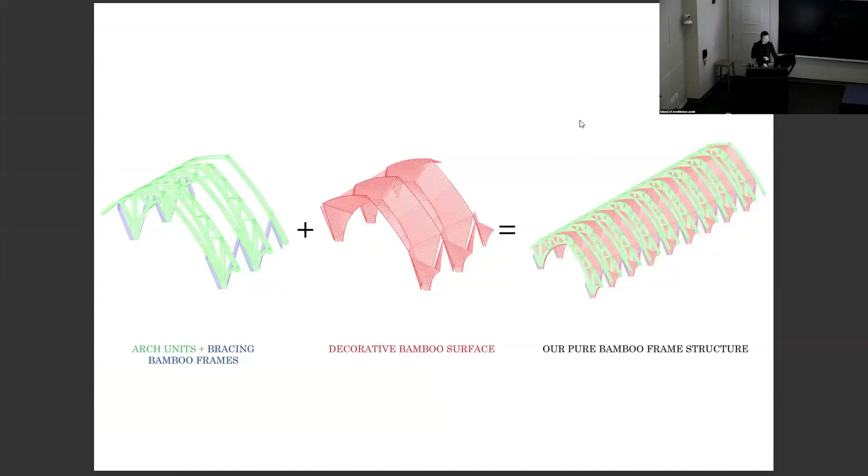Not decorative, it supports the structure in the shaking, and it becomes a really complete structural system. You can see here it connects well to the outside.

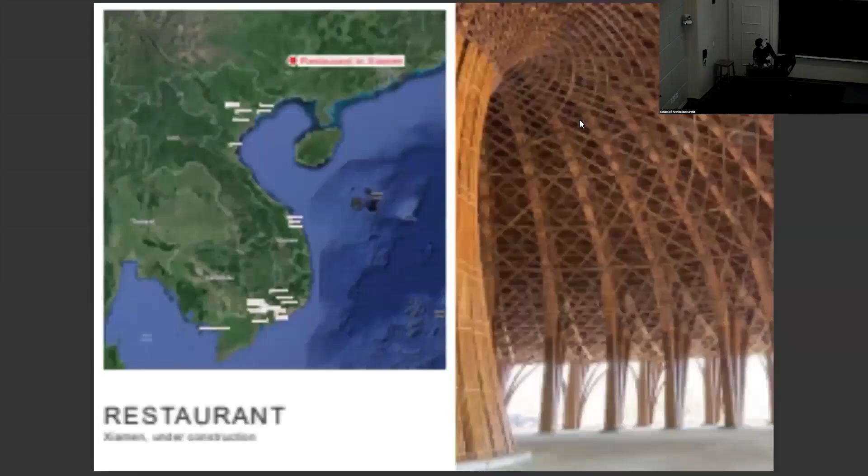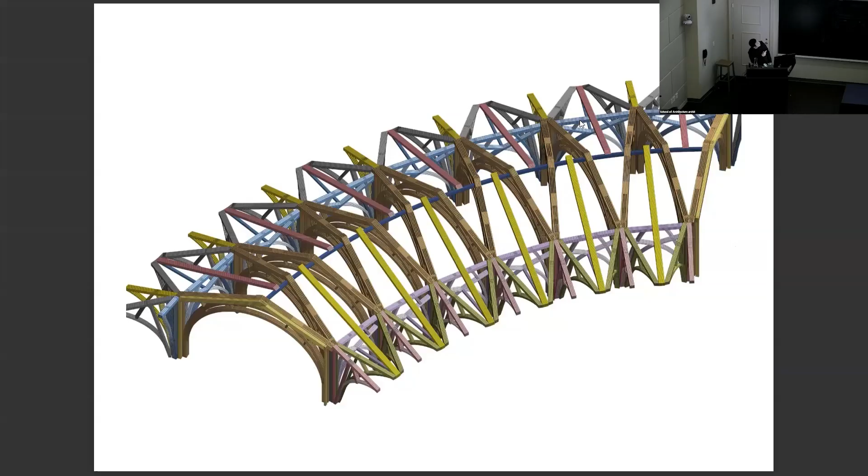I intentionally made it complicated because I think later I will do a PhD thesis and use many different structure systems, spaces, and joints. Here is a different structure system, and normally I don't use a joint like this. It complicates many types of elements together to make the surface inside like this one, which is moving around. But this one helped me very well.

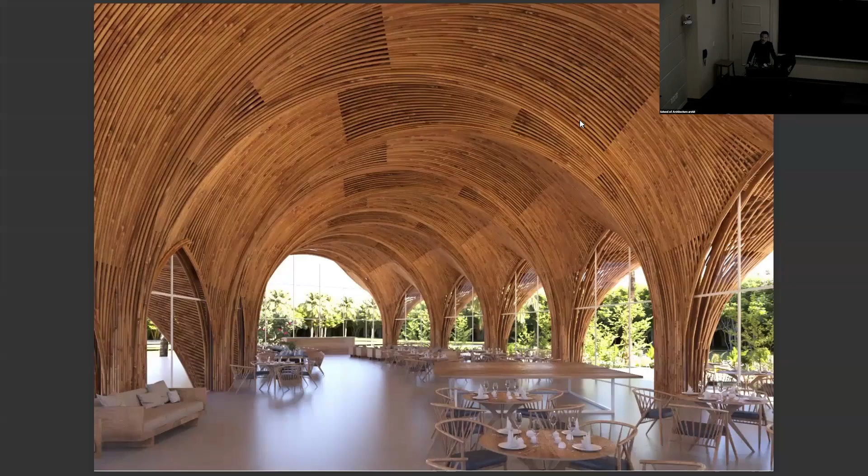Finally, during the quarantine in my house, I didn't have anything to do, so I started writing my doctor's thesis. The professors liked it, and within 3 months I submitted it to Waseda University, which is really good in Japan. All the professors said yes, we like it. Then within 3 months they allowed me to do the entrance examination, the middle presentation after 1 month, and the last presentation after one more month. So I compiled all the bamboo structures, spaces, and joints I had been doing for about 17 years before. But during COVID it took me only 3 months to finish my PhD thesis, and I submitted it.

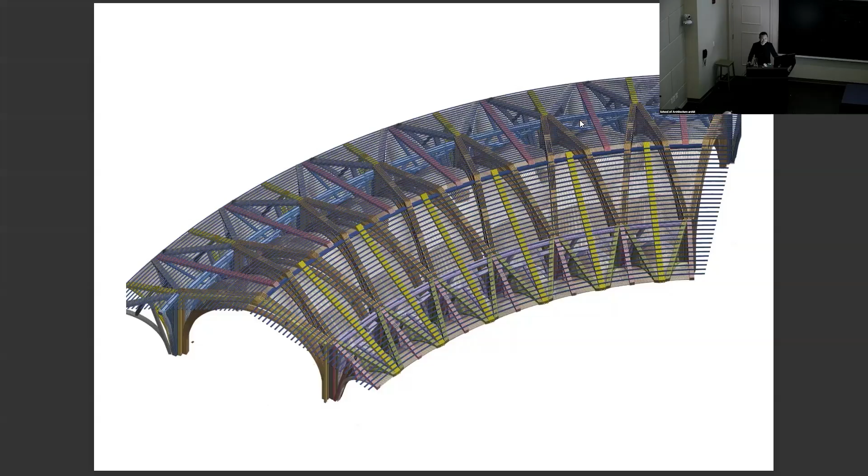There is one regulation in Japan at that university: if I won something like a gold medal from the Japanese Architect Institute, then I have the right not to go to school, but just submit the thesis. I had won maybe 7 times for the Asian Architecture Institute Award, and one time an overall award for Asian architecture, like building of the year. So they said maybe you are eligible to submit your thesis without going to school. I said, oh, lucky. So I submitted, and within 3 months they allowed me to graduate.

Then when I was teaching at Yale, a professor there said your bamboo structure is quite interesting, you should submit a paper for our journal. I said yes, and submitted two papers, one on structure and one on something else. He said okay, good, and published both papers for me while I was teaching at Yale. What I mean is it was somehow too lucky for me, because they had good regulations that worked in my favor. Otherwise I would have had to spend like 5 years in the university to get the PhD, right? Yeah, yeah.

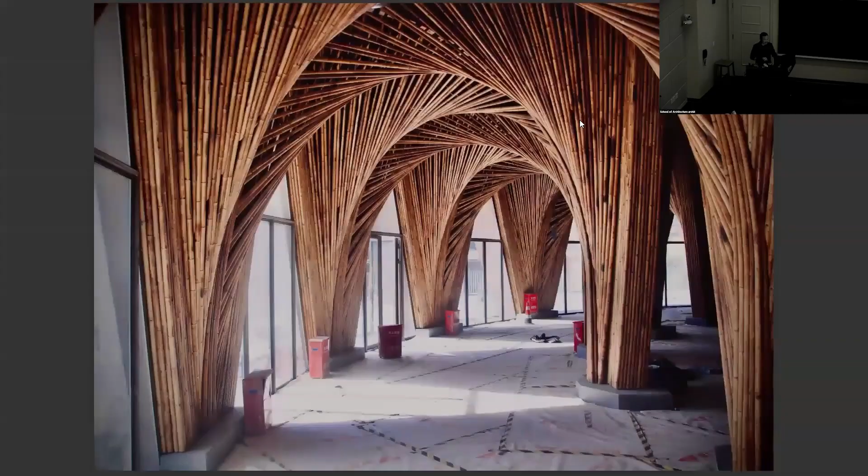And here's a new project in China. The client is quite nice. We worked together with Vietnamese workers and Chinese workers. Basically this one is for Chinese workers, and they did quite well on the HP shells. If I hadn't graduated yet, maybe this would also be one of the structure types for my thesis. All the HP shells come together and go out.